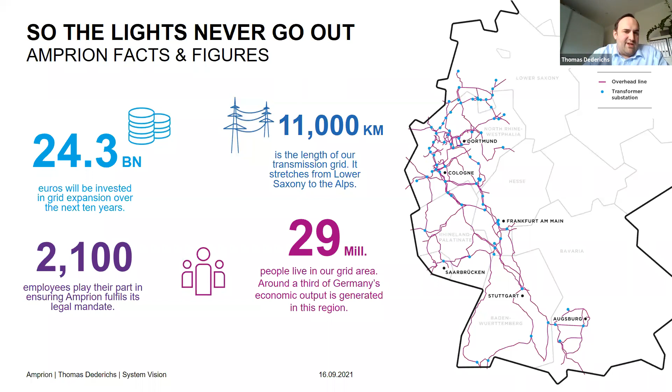So a lot of questions regarding system security, system stability lie with the TSO. We connect Europe. We are just a small part, obviously, of the entire transmission grid spanning from Portugal all the way to Estonia. And this is, some might say, the biggest man-made machine ever built. It spans thousands of kilometers in all directions, and it is working perfectly in sync.

The processes and the signal speed on this is a fraction of the light speed. So you can imagine keeping all that system running, and it's basically been up since World War II. So the entire electricity transmission grid has never seen a complete blackout in all that time, and this is because of our people.

For example, Brauweiler near Cologne is where we as Amprion are responsible. You see an area by the dotted line, which is our most important area that we are responsible for, but we're also coordinating frequency stability for the entire European grid area. And so Amprion has a couple of special responsibilities with regards to system security.

I promised you to start with carbon dioxide, and I'm hopefully not repeating myself, because you've obviously had a very interesting first day of talks already, and you already heard a lot about what is changing. So I'm just putting up one slide and one graphic, and I would just summarize it as the science is in. There's not much discussion on the question of is there climate change happening, and is there an effect of what we as human beings are doing on that. I think that is all becoming very, very clear.

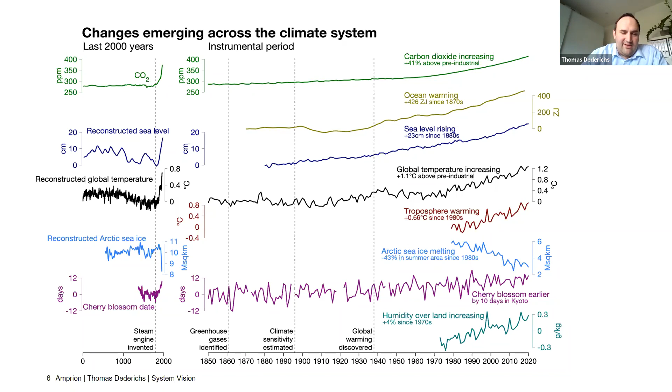However, and I find this very interesting, the question of what exactly does that mean to be responsible, and to be, the IPCC would say, very likely responsible for an anthropogenic climate change. What does that mean, and how do we mitigate those effects? I wanted to just give you a few thoughts of mine on that topic. I'm obviously not a climate expert, but I'm reading the IPCC reports very carefully, and I'm looking at what's happening from a political point of view.

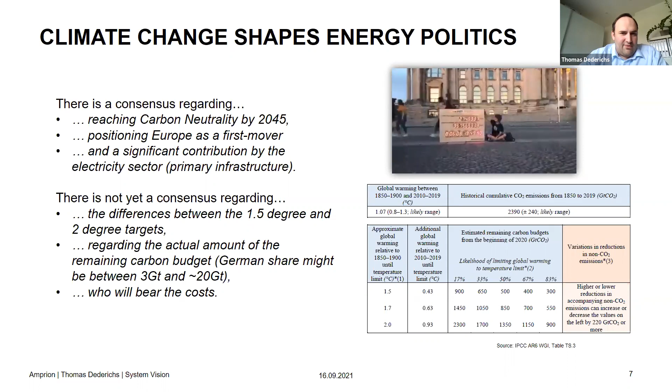And I think especially Germany, we've taken a very peculiar way of doing energy transition. Most countries that want to go carbon neutral right now are either looking at a lot of nuclear, a lot of hydropower, or very, very well-suited regions for wind and PV. And Germany basically has none of those options. We do have PV and wind installations, but from a point of efficiency, those are usually less efficient than some of the most prestigious regions in the world. Australia, for example, has very interesting regions for wind onshore, which have an efficiency rate similar to what we see only in the North Sea.

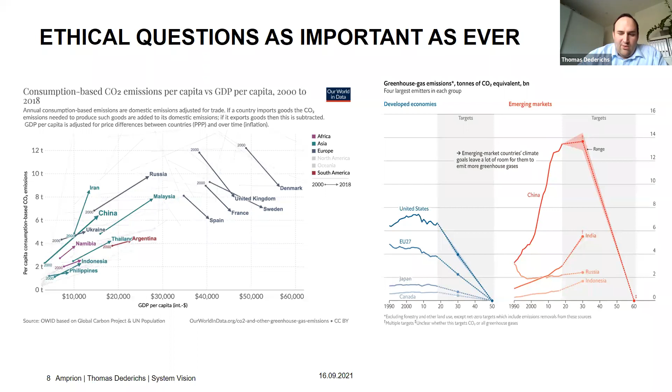And so this brings me to my last aspect regarding the carbon question, and this is the reason why I'm so glad to talk to economists today. I think the most important question regarding our future grid development and our customer base is the question of how to implement some form of, I would say, safety mechanism, which basically prevents the total loss of an industry base in Europe.

When we discussed with BASF or Bayer or Thyssen, for example, about their future prospects, maybe 3, 4, 5 years ago, when carbon prices were still fairly low, they were basically always looking at how long can we stay in Germany, how long does it make sense to produce here versus somewhere else in the world. And due to the discussion of the carbon border adjustment mechanisms, this has changed. Those companies now actually see a possibility for an economical way of producing carbon neutral in Europe.

And this is basically what is interesting for us as an infrastructure provider, because now we are facing actual demands in terms of green hydrogen, green electricity, all kinds of green fuels. I'm not entirely sure how many fuels we will see in the future. We've always had a diverse and heterogeneous set of fuels. We've never had a single fuel society, and I think all the talk about an all-electric world is still over the top. I think in the end we will see different fuels used simultaneously.

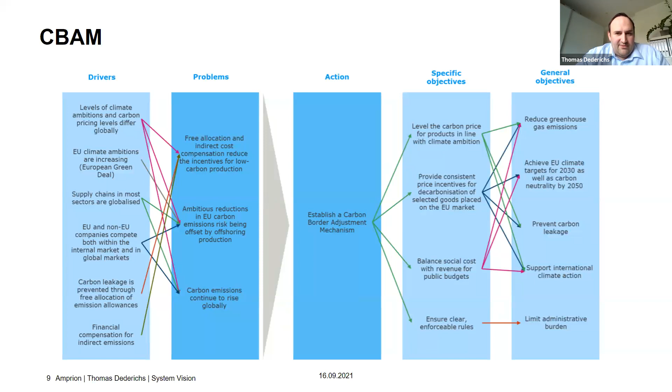Leaving that behind, I would turn your attention to the topic of hydrogen. Why is it that we're looking at hydrogen at the moment? I've just tried to give you an idea of how much has changed in the business of transmission grid operators just over the last few months, actually. I think it was obviously in part due to the Bundesverfassungsgericht, the highest German court, which actually decided that climate neutrality is a privilege that has to be provided for future generations.

And after that, we changed the rhythm of the grid development planning. So now we're doing it bi-annually, every 2 years, which means that we have some degree of freedom on what target year to look at. Over the last few years, we have focused work on 2030 and 2035. We have done one extension for 2040 in the last grid development plan.

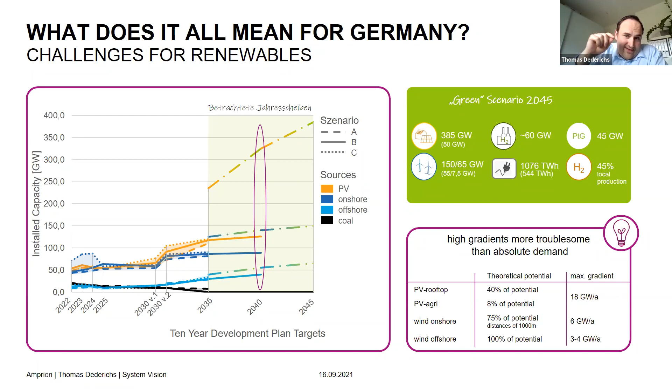And why is this hydrogen topic so interesting to us? Well, to sum it up in one picture, it's that picture.

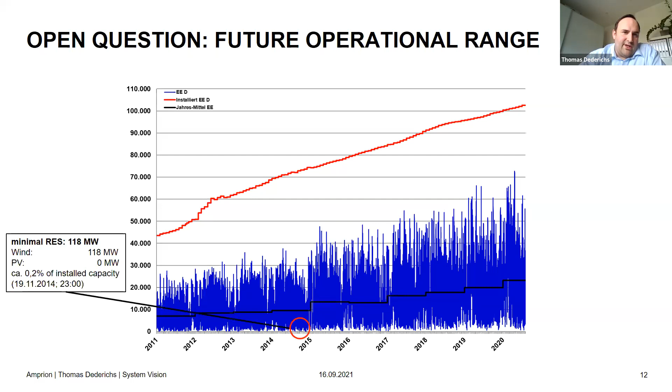And these are figures that I actually got from our people in Brauweiler, which are looking at the grid 24/7, and they just provided me with some figures, just to give you an idea about the volatility of the system we're currently already dealing with.

Last year we crossed the installed renewable capacity in Germany of 100 gigawatts. So the system is already basically mostly a renewable system from a point of installed capacity. It's not yet there from a point of produced electricity, because obviously there's this vast range of available power in the field. And so what we're seeing is there are still times, even in 2020, where less than 1% of the installed capacity is actually available.

And so we will have to look at every possible solution. Basically, we will have to look at storage, and hydrogen comes into play as soon as you're not in the, let's say, intraday area. Intraday batteries and car batteries and all those kinds of storages will probably help a lot.

But as soon as you're looking at seasonal changes and the question of how to bring something like 100 or 200 terawatt hours of energy from the summer period to the winter period, the battery is no longer an option. And then you are looking, as of now, at hydrogen as the most promising candidate. But everything else, demand side management, is also coming into play, as well as maybe some remaining peak power plants, obviously carbon neutral peak power plants.

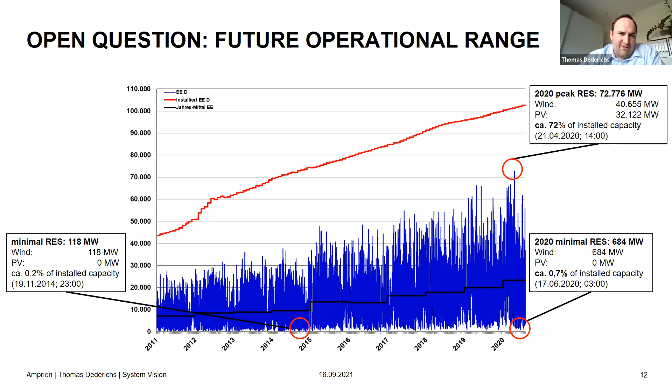I don't want to go into detail on that, because this is obvious to all of you. Obviously, we're looking at significant parts of the year where the electricity production is simply much higher than what we are used to on the demand side. And this brings us to another question, because one of the most interesting questions from my point of view as an infrastructure provider is, again, what is the operational range of this energy system going to be?

And maybe a few years back, the big question was always, what are we going to do in those times where there are no renewables? What are we doing basically at the lower end of this? What is happening if there is a demand of maybe 50, 60, 70, 80 gigawatts, and there's a very, very low number of renewables online?

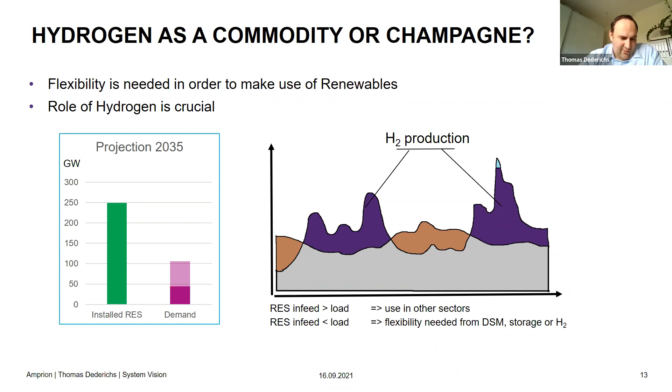So in the end, what I'm trying to tell you here is hydrogen might possibly be the most important solution. It's definitely not the only one. And so since we're not smarter than anybody else involved in this discussion, we tried to do a little crowdsourcing. And this is actually why the presentation is called System Vision.

We started a project a few months back where, as part of our preparations for the grid development plan, we started discussions with more than about 24 NGOs, customers, stakeholders, politicians, ranging from Volkswagen to Trimet, producer of aluminum, to Frankfurt Airport, to Germanwatch, Deutsche Umwelthilfe. There were discussions with Greenpeace and the BUND and all kinds of stakeholders.

And we asked them all to basically characterize, parameterize their future vision of a climate neutral German and European energy system. And we've come up with very interesting results so far. I'm not able to share all those results yet, because we're still in the works, and this will be published over the course of the next 2 months. Stay tuned and look up on the website or our Twitter feed what is happening with that.

But just to give you an idea, what we're doing is, first and foremost, a simple energy system model. But for the first time, we're doing this as an integrated, holistic view, a cross-sector analysis where we have an electricity grid, methane grid, as well as a hydrogen grid possibility, at least. And we're using a combination of optimization processes and some linear models, which give us a first idea of how feasible those different scenarios are. We will then look at what that means in terms of imports and exports, and in terms of sufficiency of already existing infrastructure, and so on.

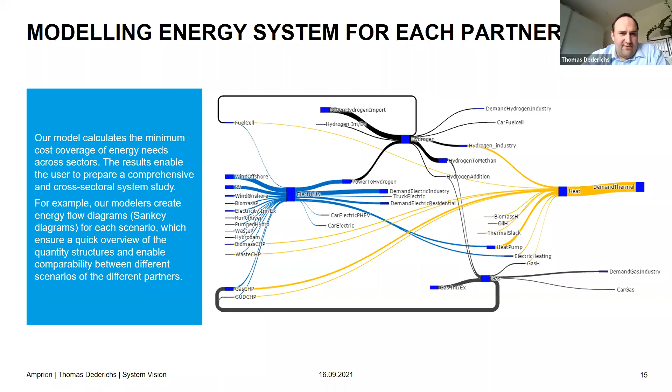And just to give you a clearer picture, for all of those parameters, we're usually doing a calculation for 8,760 hours per year. And we are always doing this on a regionalization where we're looking at every single grid connection point from the transmission side of things. So Germany is basically cut down into, I would say, 200 little pieces, more or less. And what the colleagues try to show in a very graphic way is that the future imbalance that we're facing is like nothing we've ever seen before.

The average transport distance of a single kilowatt hour, or a single electron, if you want, has been fairly short. We had a very homogeneous distribution of power capacity over Germany, with a lot of nuclear, obviously, in the southern part of Germany, even coal-fired plants along the Rhine River, Karlsruhe, Mannheim. There are still hard coal power plants online. They're now coming offline as we're speaking. But you can see the distribution, even looking at 2022, was fairly evenly distributed.

And what we're now looking at in 45, even though there's a lot of decentralization happening, even though there's a lot of PV being installed on rooftops, from a grid point of view, we're still facing this enormous infeed of offshore wind, which is a very centralized and, to be frank, a very far away form of energy. And from every simulation and every model we've seen, we do need to include this, because it is probably not feasible to provide for the entire industry I just talked about, the chemical industry, steel industry, and so on, just with PV installation. So we will need those amounts of electricity produced by offshore wind.

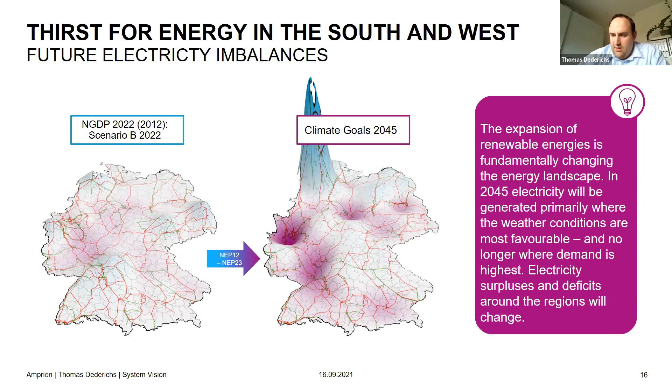And we are currently installing those cables on land as well as at sea. For basically every single offshore connection coming online, I think, beginning in 3 or 4 years, we're currently using a smaller version of that cable with something like 320 kV. But the newer cables are coming online. They're being bought right now, planned right now, and discussed right now because they actually change a few ecological properties.

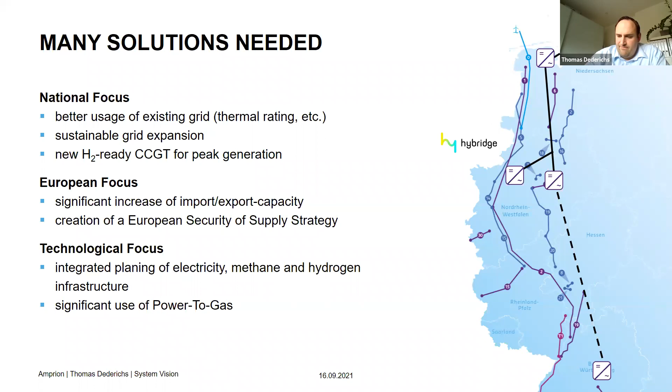I have two more small subjects I want to just very briefly address, and maybe we can deepen the understanding in the discussion. And first of all, if we come to the point where we will actually use all the tools in the toolbox, and when we're actually able to implement an energy system with all those 400 gigawatts of renewables, there are still questions to be answered. And one of them has to do with system security.

I mentioned some of those system services, but the list is not complete. There are some things that we're just now starting to look at. Momentary reserve is one of them. Momentary reserve is basically a function or a capability of the grid to withstand large failure situations, loss of a large plant or an offshore wind park, or loss of a line, which would then lead to hopefully a situation where we can handle that single loss.

The entire grid structure is usually operated in what we call an N-1 mode. So we have to be able to withstand the loss of every single piece of equipment we have, from a transformer to a line to a plant. Everything has to be exchangeable.

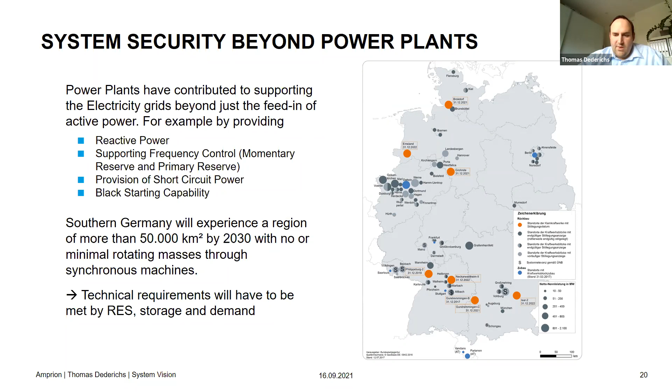And the other side, I think, is probably coming back more to your field of expertise for the economists. The distribution between capital and operational expenditures is changing rapidly as well. And so what we're looking at is a system where probably by the middle of the century, something like 80 or 90% are capital expenditures, because almost all renewables are just capex. All of our grid infrastructure is just capex. Most of the storage equipment is just capex. You always have some form of losses, which you can attribute to operational expenditures, but the vast majority of the costs of the system will be capital expenditures.

And we are therefore very interested in all kinds of ideas of how we are going to finance this future system. Does it still make sense to charge people per kilowatt hour or megawatt hour if electricity is abundant for thousands of hours? And does it still make sense to strongly separate the costs of the grid from the cost of the product itself?

And so there's a lot of things going on right now. And if you're looking closely at what's happening, if you've read the election programs for all of the major German parties, they basically all want to reduce the renewable subsidies, leading to a co-financing, and this has already started, co-financing through the tax system, basically. And we now have a climate fund associated to the federal government, which allows us to put billions of euros each year into those mechanisms.

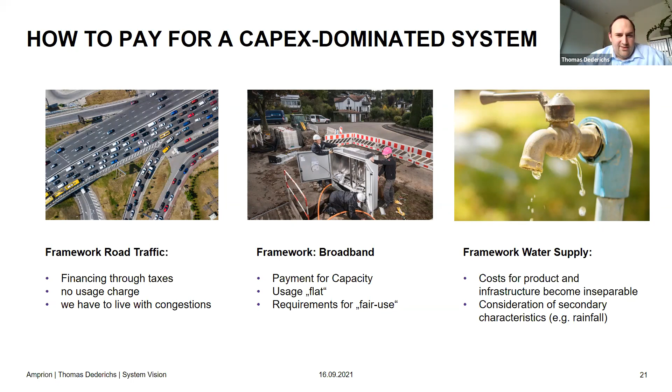But again, I'm very interested in what you are thinking, and so I would end on that note. I'll show you again the website I referenced. If you want to look it up, it's unfortunately still only in German, and there's an English translation coming up over the next few days. systemvision2050.de. We have about a dozen partners online already. They present all their ideas and all their figures. If you want to see how much hydrogen they are importing, where the heat is coming from, how much mobility and electricity demand they are seeing, you can all look it up on the website, and you can ask me anything you want.